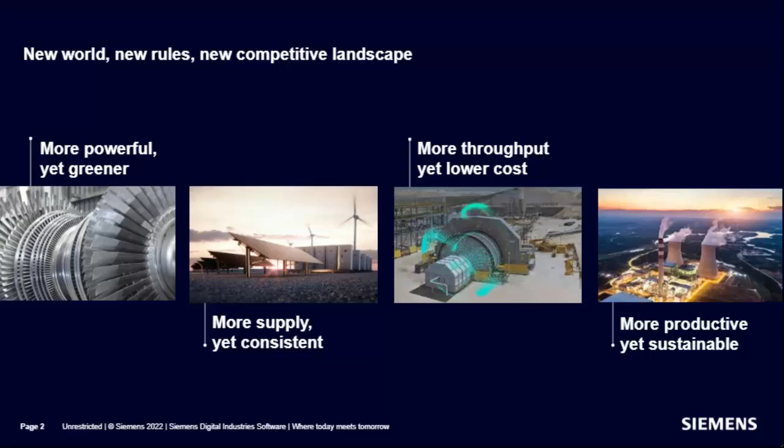But we're primarily focused on deep engineering innovation, and there really isn't a more exciting area right now than energy transition to be working in. Now, the challenge in terms of what comes with that is an explosion of complexity, and this has been gaining ground on us over the years in terms of the volume of data, the sophistication of the tools we're using, and we've got things like hypercomputing, more powerful computers. We've got the cloud, but at the end of the day, it's created enormous complexity, and this can be a challenge for some organizations, or it can be an opportunity.

So when we're looking at what's happening in the industry in terms of the trends, we really see two types of customers out there, two types of companies. Those that are adept at saying, hey, within this complexity, there's an opportunity, and we want to get there first, versus others that maybe feel the need to defend against this complexity and how to hedge the risks. And really, the most exciting innovations are going to come from turning that complexity into a competitive advantage. So it's a bit of a blessing, but it's something to hedge against as well.

So the analysts are always an interesting group to keep track of. I've clipped out a table here from a study done by the Aberdeen Group. They're one of my favorite analysts. They always have lots of substantiating data, and I liked what they were saying here in terms of how companies are using simulation to improve their product designs. Now, product design in energy, it could be a plant, it could be a project, it could be an asset, it could be a system, but collectively, they're all at the end of the day products.

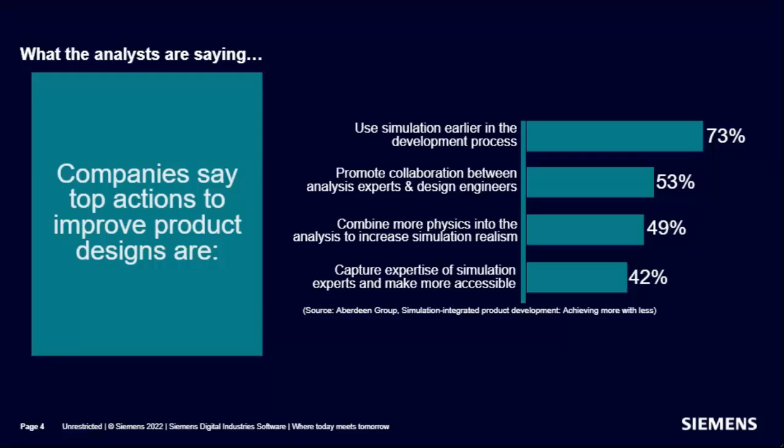49% were looking to combine more physics into the analysis to increase the simulation realism, making sure that, hey, once we produce this thing in real life, it really does perform as the simulation suggested. And then lastly, at 42%, capturing expertise of simulation experts, making them more accessible. And that's got to be incredibly important because of demographics as well, as so many of these people are ready to retire. So if you put all this together, these are the various lenses that we look through at Siemens, and then we come back to the industry and say, okay, what's going on in the industry? We try to distill that down to 4 major trends.

We've got, as always, and this hasn't changed even with energy transition, a massive pressure on companies to demonstrate superior financial performance. With the level of transparency in the marketplaces, it's a lot easier than it used to be for people and shareholders and analysts to be able to rank industry segment players against each other, and determine how to best put investment capital to work, which impacts the capital investments in the industry.

Which is going to be, because money is going to flow to where it is treated best, right? As we all know. At the same time, we've got the digital world accelerating, right? And that's changing everything. It's changing the way we produce software, and it's changing the way our customers execute projects and the way OEMs produce equipment, right? Which in many cases are now computers that behave like assets. So that gets a vote in the trends that we're looking at.

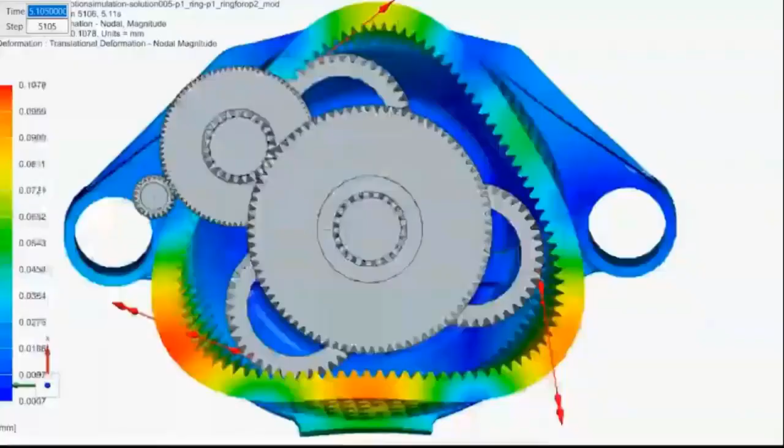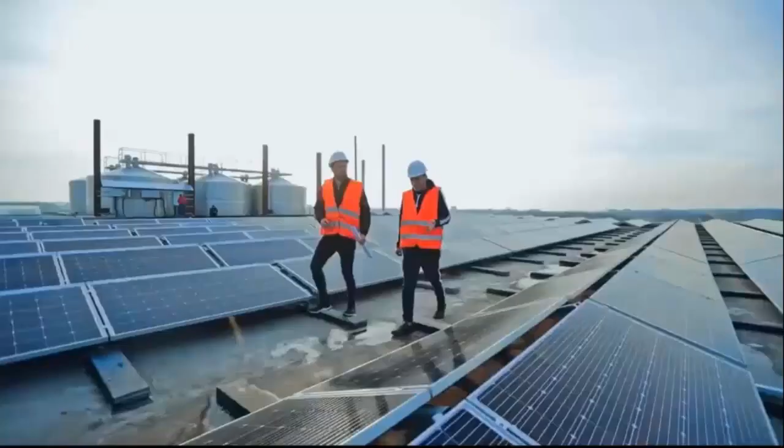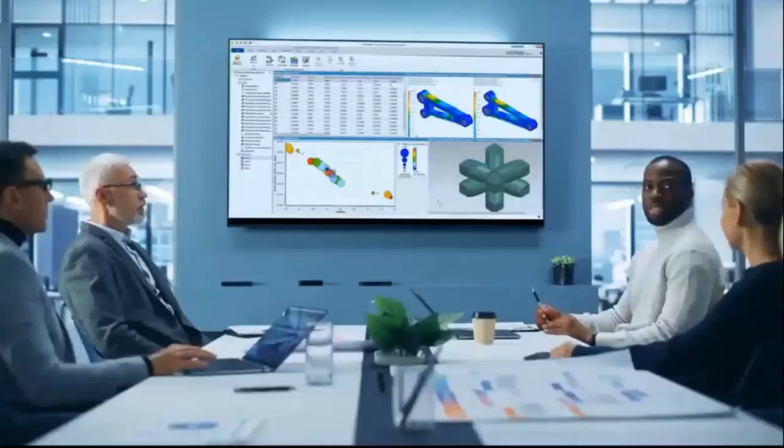Seamless high-definition simulation provides reliable and realistic results for today's energy and process engineers. So, maximize innovation and harness the power of multi-physics simulation to master complexity and improve predictability for sustainable operations. Empower engineering teams to light the way using Siemens Advanced Engineering Simulation. Remove human bias that can lead to preconceived conclusions and instead create alternatives that no one has thought of before. Connect engineering teams using the cloud to promote collaboration and innovation while improving change management and data reuse.

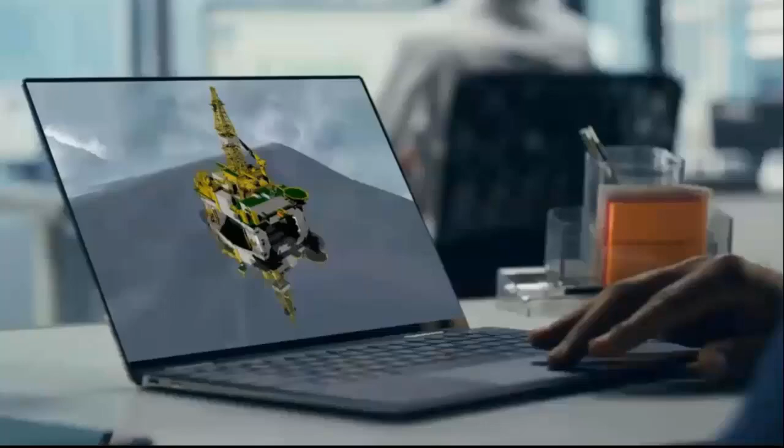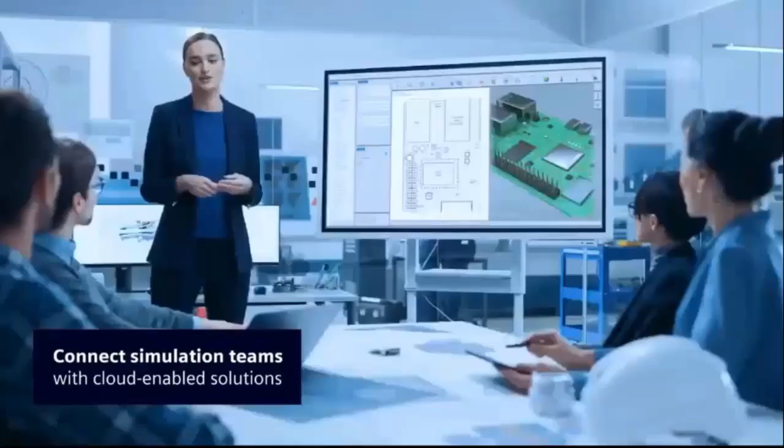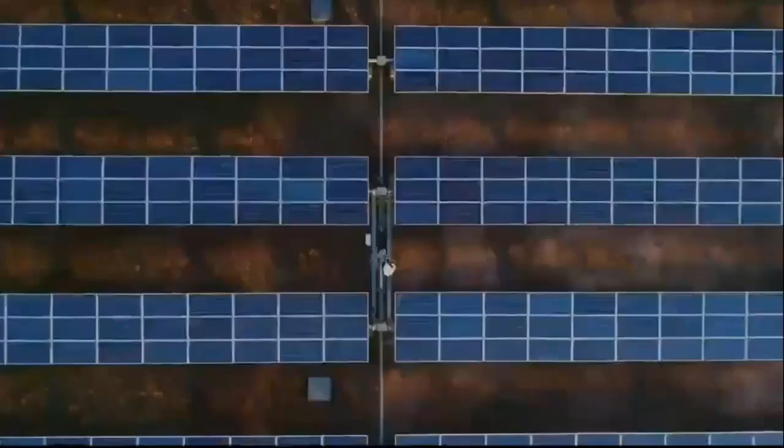Use design exploration to understand the complex non-linear relationships between process variables and behavior to think out of the box to achieve operational excellence while improving sustainability. Connect distributed teams with cloud-enabled engineering simulation and test solutions to focus your best minds, using a systems engineering approach to improve teamwork across all disciplines. And empower engineering teams to light the way using Siemens Advanced Engineering Simulation.

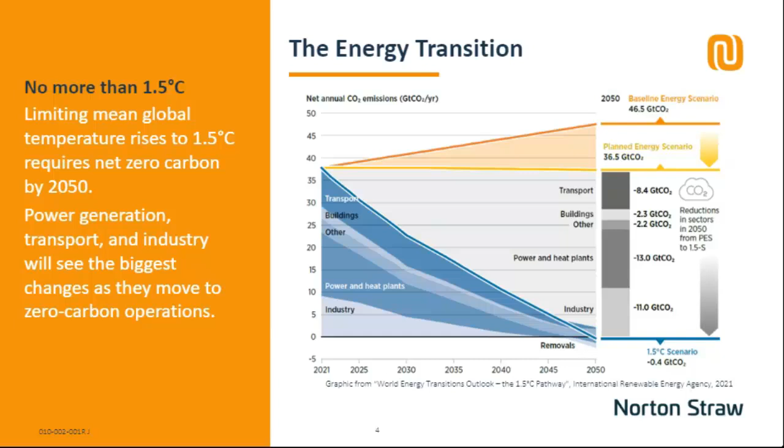Oh, I've accidentally skipped one. Beg your pardon. It's doing that. Why is it doing that?

Stop doing that. Right. That graph came from the International Renewable Energy Agency, and they also predicted that there should be 6 major contributors to carbon reduction. The big two there are renewable energy and end-use electrification. And both of those are obviously ongoing fairly rapidly, and we will talk about those in a bit more detail going forward, because there are some significant challenges caused to the electrical grid by doing things like that.

The electrification thing is not just cars, but also industrial processes, domestic heat. In many parts of the world, domestic heat is provided by gas boilers and other similar activities like that. Not purely transport, it's also domestic and industrial uses. Energy conservation is already having an effect, and I'll touch on some numbers on that later on.

The role of hydrogen is very interesting. Hydrogen itself is not necessarily a green fuel source. It depends on how it's generated. It's probably best seen as a transport vector and a storage medium rather than a fuel source. The number the IRENA uses there of 10% is also up for a lot of debate. Some people think that hydrogen could be an awful lot more important than that, but that's a working number in there.

And down at the bottom, we've got carbon capture and bioenergy with carbon capture, or BECCS, as it's often known. Conventional carbon capture is taking industrial processes or power generation, sequestrating the carbon dioxide and pumping it offshore into disused gas reservoirs, usually, or even onshore disused gas reservoirs or salt caverns.

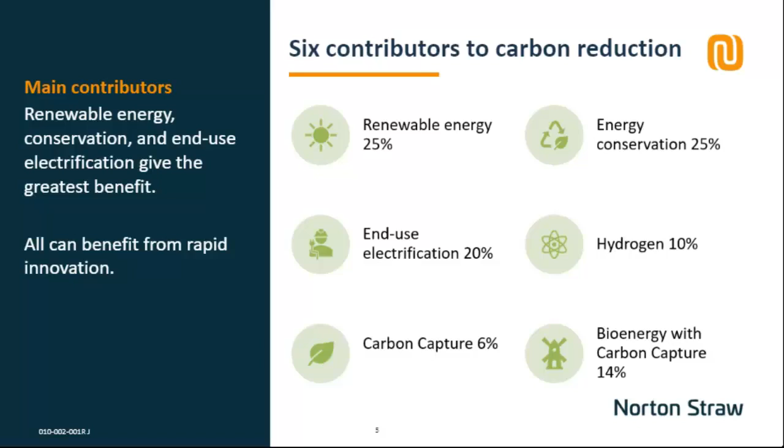And a typical industrial society, and it does vary from society to society, but say a typical industrial society, very roughly 20% of energy is carried by the electricity grid, roughly 40% in natural gas networks in those countries that have them, and another 40% in transport fuel. That's a 20-40-40 split, which is fairly typical.

If we're going to use electricity instead of hydrocarbon fuel for vehicles and for some industrial processes, then the grid capacity has to increase considerably. Also, the electricity being used to generate that grid has to be almost entirely renewable, 90% of the net zero model, because of the carbon sequestration aspects there. Also, the grid installation rate has to increase.

If we're going to target 2050 with 3 times greater electricity generation than there is now, of which 90% is going to be renewables, then the replacement rate or the expansion rate of the electricity grid has to be 4 times greater than it is now. This is a major shortcoming in the energy transition at the moment. There's not enough effort being put into electrical grid expansion.

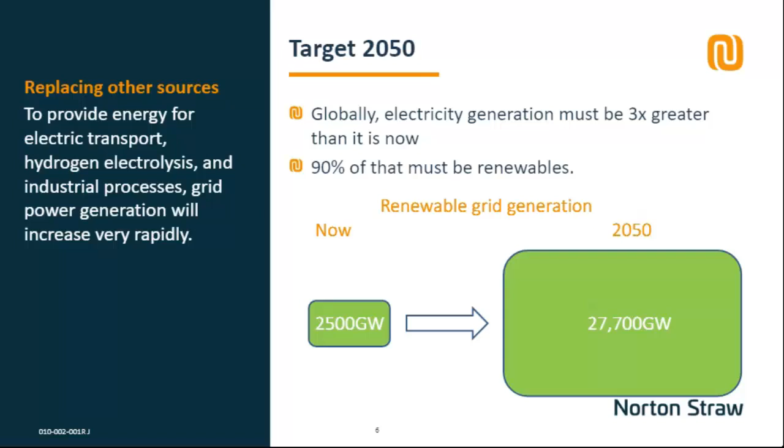This is a fundamental change in the nature of the future electricity grid. We're going from a traditional model where you have a relatively small number of large electricity power generating sources. So nuclear power stations, large coal power stations, even large gas power stations, which are usually fairly widely distributed across a country or a region.

And the electricity is transported on a core grid, fairly high voltage, usually 400 kilovolts, and then gradually breaks down into smaller and smaller branches. It's a tree model. It's like a tree. You have a large core and then it branches down into smaller branches. This is going to change because the energy sources are going to become decentralized.

We have things such as rooftop solar panels putting electricity back into the grid now. We have domestic biomass generation, domestic wind generation, even domestic heat pumps. It's quite possible for a house to generate more electricity than it uses, and so that needs to go back into the grid. This gives a massive problem to grid stability.

Grid stability is usually about the balance between the supply and demand, and imbalances are seen as changes in the frequency, the electrical frequency of the grid, which is usually roughly 50 hertz. Those changes, if it goes outside a certain bound, roughly 0.5 hertz each way, are sufficient to knock out equipment. And we've already seen failures in some parts of the country.

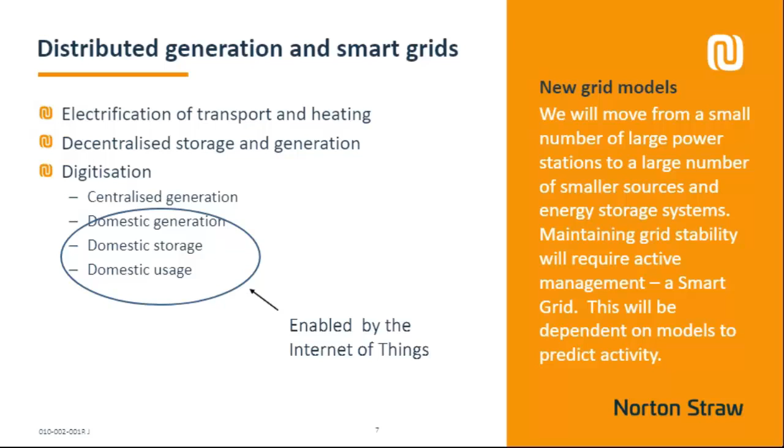Modeling is going to have to come into play. There are going to have to be digital twins of the grid running all the time to try and pick up these variations and try and keep the frequency variation within acceptable margins.

Some of this is happening already. The EU mandated 80% smart meters by the end of 2020. I don't think it quite made it, but it did mandate it. So some of these changes are happening. The electricity generation is also changing.

So if you look here at the UK sources for the last 8 years up to 2020, coal in 2012 was still a very significant contributor. But you can see the way that coal has dwindled to almost nothing. And if it hadn't been for events in Ukraine, it would have gone to nothing by now. The last 2 coal power plants got a bit of a reprieve on the back of the Ukraine crisis, but coal would have gone completely.

What's curious about this one, though, is you see gas there on the right. That increases to balance for coal, but then it starts to drop. In 2020, it actually reduced. And that's because of the very rapid increase in wind and solar. And there's an awful lot more going in. There's something like 65 gigawatts of wind generation going in the next few years. So that's going to get even greater. So you're seeing this shift from the left of wind and solar, pushing the carbon-based stuff off to the right.

One thing I should have pointed out was that the total consumption isn't shown there. It's just shown the percentage. Total consumption dropped by 16% over the same period. And that was largely down to energy conservation measures. The IRENA data mentioned that one of the key drivers is energy conservation. That's already starting to come through, with total consumption dropping, certainly in developed economies across the world. It's very obvious.

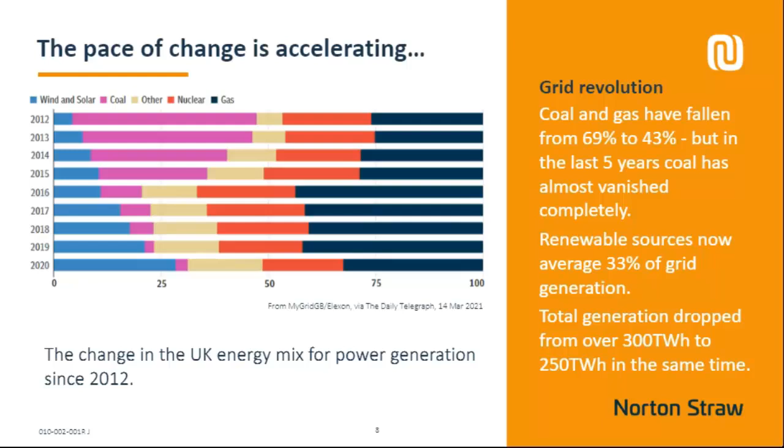There's 3 different ways in which we can use simulation in addition to the digital twin approach for actually modeling the grid itself. Firstly, there's the systems model. This is a classic system of systems: lots of different systems connected together. And by building detailed system models, we can do things like techno-economic studies. We can look at multi-criteria decision analyses. We can look at different ways in which the grid itself can be optimized and modeled using tools. AMESim comes to mind, and various other similar tools like that.

We can use much more detailed or even reduced order models to model the design itself. So we do a very detailed model for design, break it down to a reduced order model to do design optimization and space exploration work. Sometimes we can now put these together into federated simulations and start to build detailed models of the wider system itself. Federated simulation allows you to put in these detailed models or take them out and replace them with reduced order models, and then run them a bit faster and look at different options and different ways of doing things.

Ultimately, those design models can be reused as a digital twin for operational models. In this case, we would take something, cut it down, and then deploy it operating in real time, to take condition monitoring data and interpret it using sensor fusion. And from that, you can do scenario planning, control optimization, and improve the whole thing. So I think there's 3 main threads to the use of simulation within the energy transition.

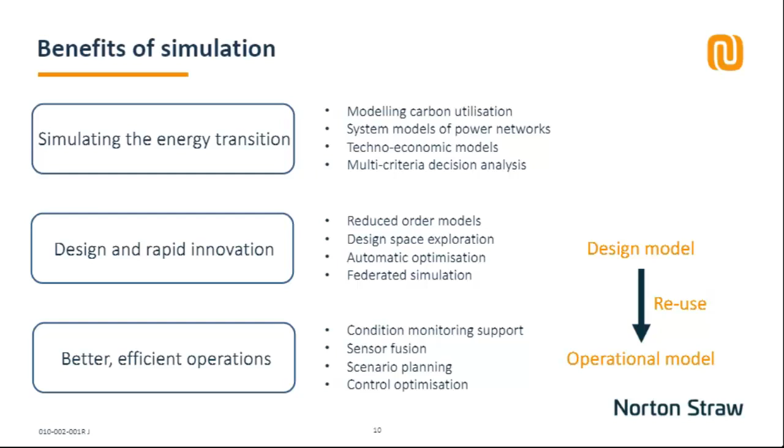There's still some work to do here, because a lot of the models that we have used historically, and I imagine much of this audience is familiar with computer modeling of engineering systems, has been at the design stage. And some of that expertise has not always gone across to the operational side of things.

And here's an example from the Dutch government, who announced the ending of natural gas extraction in 2018. In fact, for other reasons, they didn't quite get there, but they announced the end of it. And they have a large number of community heating projects, so shared heating systems. And they had to identify alternative fuel sources for these.

A lot of work was done with large-scale system models of the heating system and the power sources and things, but they didn't actually manage to get much benefit from that. So a study was set up to work out why the modeling of these systems had gone wrong. And they concluded that although the modeling approaches would add benefit, the problem was that the users on the operating side and the policymakers didn't really have the expertise to do it. And there's a quote there saying practitioners need new expertise to effectively use energy models.

So it's not just about the quality and the capability of the models we develop, it's also understanding that the users may not be familiar with some of the techniques that we're familiar with, and there needs to be a process of training and education on that side to get the most out of modeling and simulation.

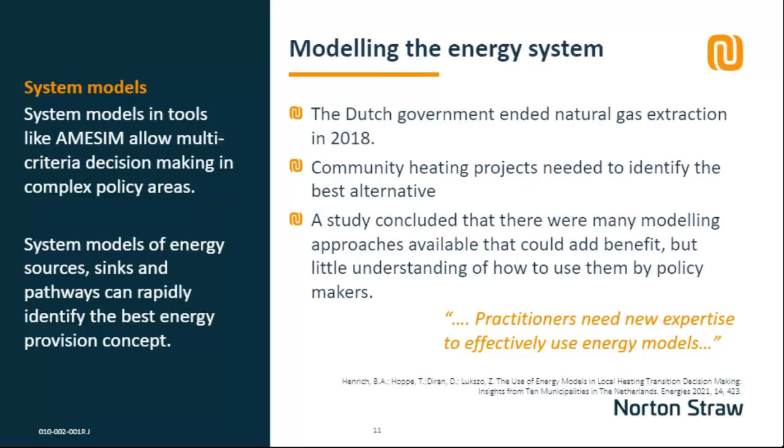I'm not going to go into some of the more detailed case studies that I mentioned before, and I'm going to start here with a study in battery storage. There's an awful lot of work needed in storage. People talk a lot about energy transition. We think a lot about how it's generated and how it's used, but because so many of the renewable sources are intermittent, we also need to think about storage.

The sun doesn't always shine, the wind doesn't always blow, the tide doesn't always flow, and the sea isn't always rough. And these things are all important for generating electricity. And when that happens, then we need to have a backup. There's quite a lot of techniques being developed, including pumped hydro, which is already widely in use in both the Americas and in Europe, although I think there are more plants being developed. Compressed gas is coming online, both nitrogen and also just ordinary air as a source.

Electrolysis to hydrogen: as I mentioned before, hydrogen is perhaps best seen as a storage medium rather than an energy source. If you have too much electricity, you can generate hydrogen by electrolysis. And there's a company called ITM Power, for example, that's developing relatively small-scale electrolysis devices that can be connected directly to individual offshore wind turbines, and from that generate hydrogen that can be pumped ashore in the gas network. And most obviously, of course, batteries.

And in this situation, a potential investor wanted to develop manufacturing facilities for liquid flow batteries. And liquid flow batteries are an interesting technology. They're really for larger scale energy storage rather than for vehicles or domestic applications, because they use a liquid catholyte and anolyte, which are pumped together through an ion exchange membrane and generate electricity that way. They can be scaled almost infinitely because it depends on the size of your tank for the anolyte and the catholyte. They have great safety benefits because they usually are different valences of the same chemical. So there's no chemical risk from them coming into contact.

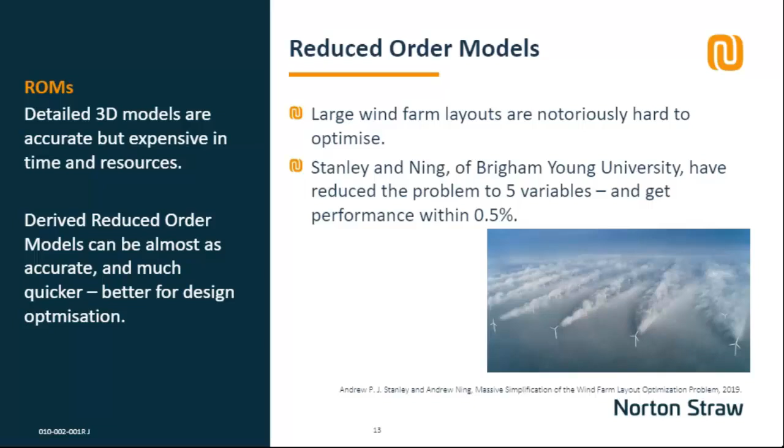Transport is another one of the key areas where we need to make savings in carbon. And electrification is the obvious solution for rail. There is electrical technology out there that can be deployed, but it's not cheap. There's an awful lot of unelectrified rail out there, and installing it is both time-consuming and expensive. In the meantime, there are areas that are electrified and areas that are not, and some rail routes run across them, particularly in congested passenger route areas.

Battery power could be used to bridge those gaps as a potential solution, but the battery itself is potentially quite large and heavy. It has to be charged over a period of time, and of course the size of it means that it consumes some of the passenger carrying space of the train. So you want to optimize your battery selection to make sure that it minimizes the space consumption and is still able to be charged within the right time. To do that, we used models.

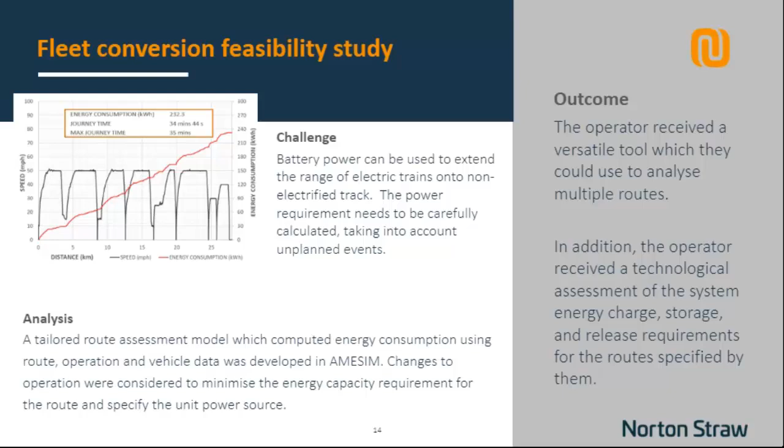Hydrogen is a useful fuel because it can be potentially substituted into the gas grid, but there are also some risks associated with that. And one of the things we went on to do with this was look at some of the safety issues.

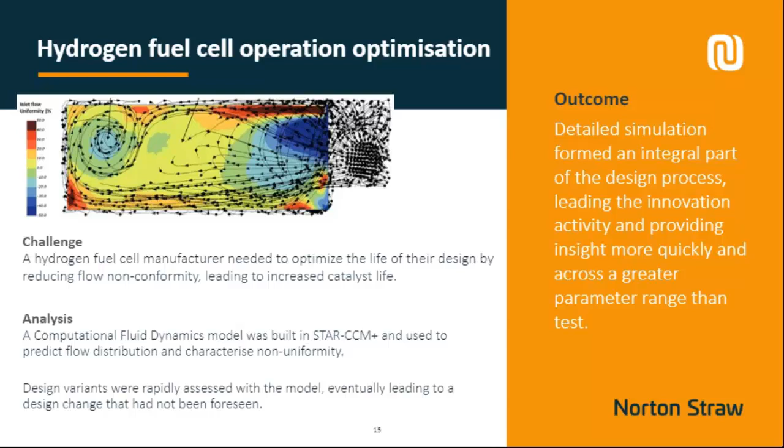It's a very wide flammability range, famously so, starting at 4% up until about 75%, at which point it could potentially explode. It's also got a very uncertain, what's called a deflagration to detonation transition point, so the point at which the shockwave becomes supersonic and it ceases to be just an explosion and starts to become a detonation with very much higher overpressures and an awful lot of damage. And it's also very diffusive. It'll diffuse through sealing systems that other gases might not because it's a very small molecule.

However, it's a very appealing energy transport approach, and the UK is moving to 20% hydrogen in its natural gas grid from 2025. And to support that, a lot of work's been done on modelling boilers, both industrial and domestic, gas burners for cooking, all sorts of different applications, and then also the safety studies to go with that.

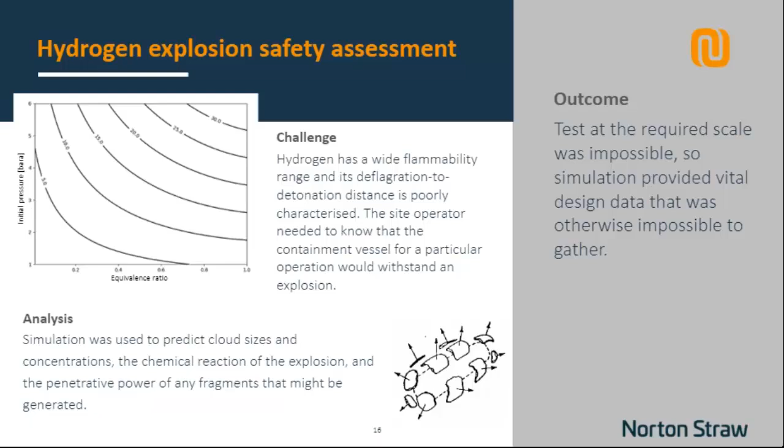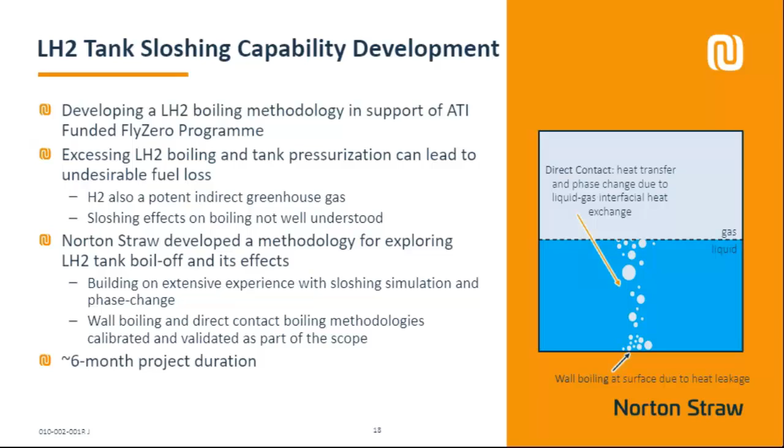Now, validation was obviously extremely important. This is a very, very novel bit of technology, and so we need to make sure that the modeling we're doing is right. There's not an awful lot of data on liquid gas heat transfer at walls. There's nothing at all on hydrogen at the moment, but there is some data around nitrogen, which is because nitrogen is often used as a cutting fluid in subsea cutting.

So we had data on liquid nitrogen jet impingement onto a metal plate, and we could predict the transient plate cooling using CFD. So a STAR-CCM+ model of coupled liquid nitrogen, obviously with all the thermodynamics and phase changes that come with that, and then the subsequent cooling of the plate. We were able to get fairly good model results of that, but at immense computational expense. In order to capture the behavior, we needed very small cells, and that led through the CFL restriction to very short time steps. And you can see there some of the agreements we were getting, which was very good. But we had to come up with a better way of doing it.

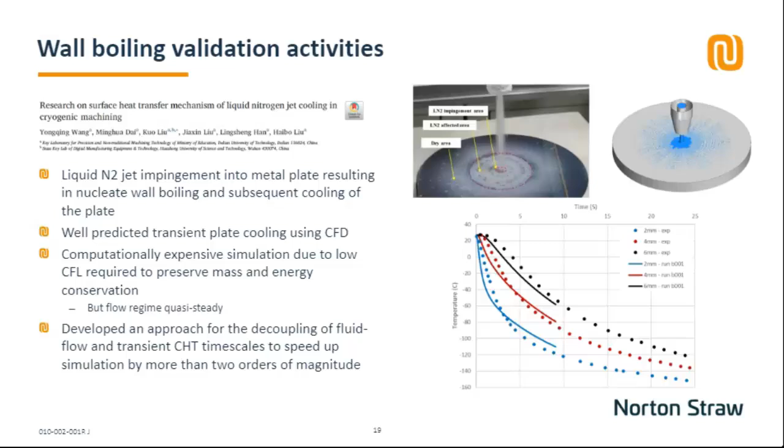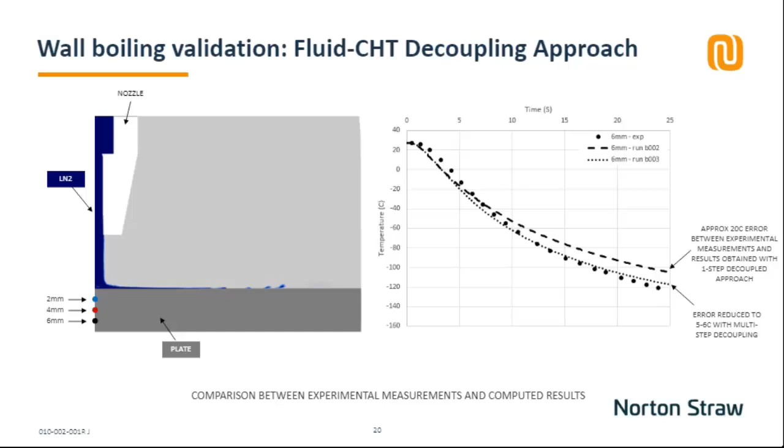So we developed an approach of decoupling the fluid flow and transient conjugate heat transfer timescales to speed up the simulation by more than 2 orders of magnitude. We had to do that right, though, because obviously the degree of decoupling affects the accuracy of the model. So we had to do different models of different degrees of decoupling to see which worked best. And you can see from these plots here, 2 different time-stepping approaches, and the better accuracy that we got by optimizing that decoupling from about 20 degrees out to about 5 or 6 degrees out, which we thought was rather good, to be honest. So we went with that method as the way forward.

We then had to model and validate the interface heat transfer and the direct contact boiling that happened. And again, there's not a lot of data on sloshing of liquid hydrogen, so we had to use a surrogate. There is some data on a superheated water and steam tank, and these have been used as a test basis as a way of studying liquefied natural gas, LNG tanks in large tankers.

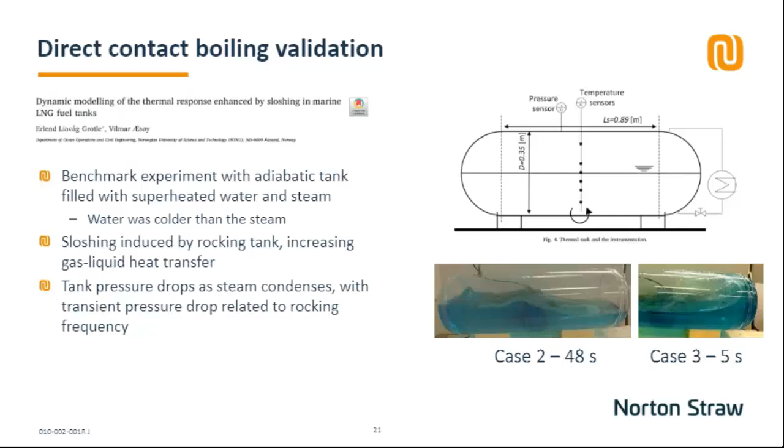The sloshing is induced by the rocking of the tank. The water is initially colder than the steam. This is slightly different, but we could work with that. So the sloshing of the tank happened, and the tank pressure was seen to drop as the steam condenses, which was not quite what we were expecting, which was interesting.

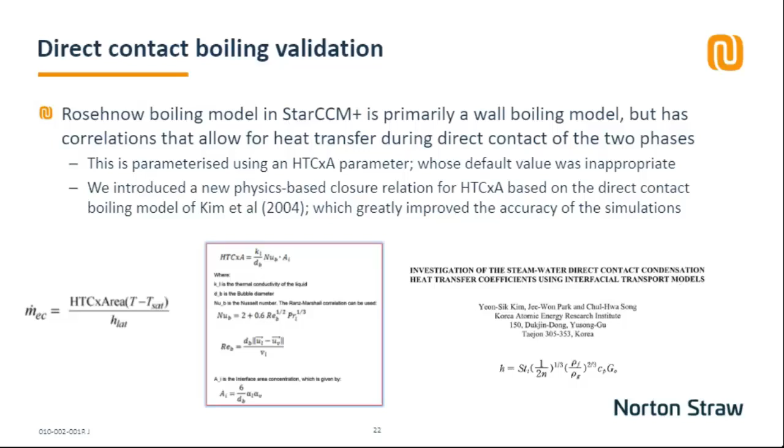The StarCCM Plus model of the tank was built quite successfully, and the Rosehnow model within StarCCM Plus was used for the interface boiling. We did make one small improvement using the user-defined function capability, and that was we optimized the heat transfer times area parameter there. The default value in the system wasn't quite right for a hydrogen situation or steam situation in this case, so we found a new physics-based closure model and applied that within StarCCM Plus to get a slightly improved boiling model.

And in fact, we discovered that sloshing was a good thing for a liquefied hydrogen tank in an aircraft. That was good because the alternative was to introduce baffles to stop it from sloshing. Those baffles would have acted as heat paths and actually made things worse. So this was a good result.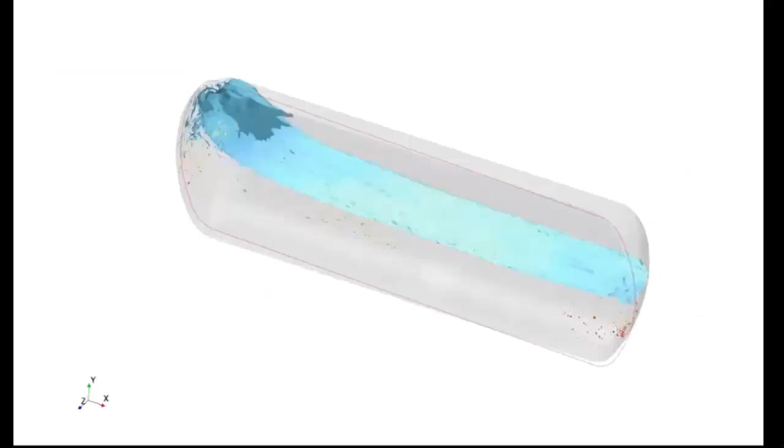On the next slide, I'm going to show one of the lovely, pretty pictures of sloshing that you can get from multi-phase CFD animations. It runs fairly briefly, but it does show the trick. And we then went on to run these models for liquefied hydrogen in different air conditions. So your classic gust loads and maneuver loads in aircraft. You can see the sloshing pattern there.

So in conclusion, things are happening quite quickly. I think more quickly than a lot of people realize. In the UK, the sale of internal combustion engines will be illegal by 2030, and John said at the start in Canada it's by 2035. That's not very long at all. You know, it's only 8 years' time in the UK you will not be able to buy a petrol or a diesel car, or a truck, which is possibly a bigger challenge.

I don't think any of the things we're talking about, the energy transition objectives we've got, are achievable without using a lot of simulation to study all the different options and all the different ways of doing things. So I think simulation has a massive role to play, both in simulating the wider system, the systems of systems, and also the details of the individual technologies we're going to have to use.